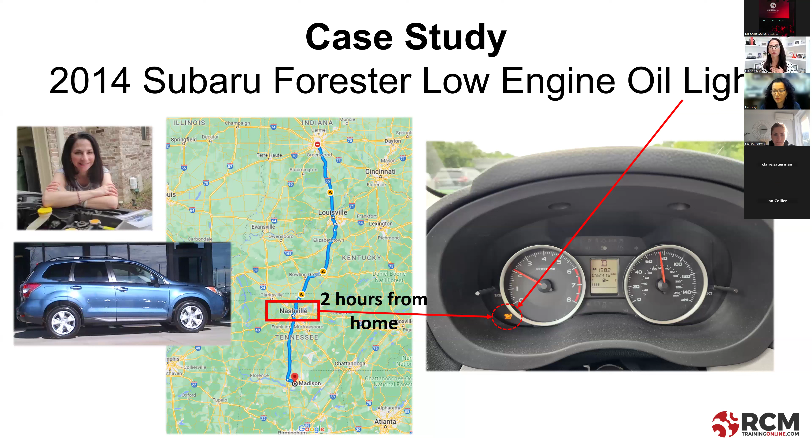Yeah, okay, definitely. Well, reliability-centered maintenance is definitely a process that can help you get out of a reactive mode. And one other thing I want to mention before we get into the details is learning about reliability-centered maintenance can be hugely advantageous, even if you never formally apply the process, because it's just jam-packed with the basics of maintenance and reliability principles. And one very important one that, in my experience, is still very largely either misunderstood or unknown.

So we'll go over that today, but just learning about RCM and the principles can help you. So let's just quickly go over our agenda and, more importantly, the goals for today's session. My number one goal is for you to understand what SAE J1011 compliant reliability centered maintenance is.

Now, will you put in the chat if you've ever heard of SAE J1011? If you see me looking this way, I'm just looking at the chat.

So SAE J1011 is a short document. It's just 15 pages, but it is the internationally recognized standard on reliability-centered maintenance. This document does not teach you how to do reliability-centered maintenance, but rather it just sets forth what an RCM process must entail in order to be called reliability-centered maintenance.

Now, this came out decades ago, but the reason why it was even established is because reliability-centered maintenance is very often so misunderstood. So I tell you this, number one, to be aware of the standard, but also to let you know that what I'm going to share with you today is compliant with the standard. So it's not my particular flavor, or I've not put my spin on RCM. I'm teaching you SAE J1011 compliant reliability centered maintenance.

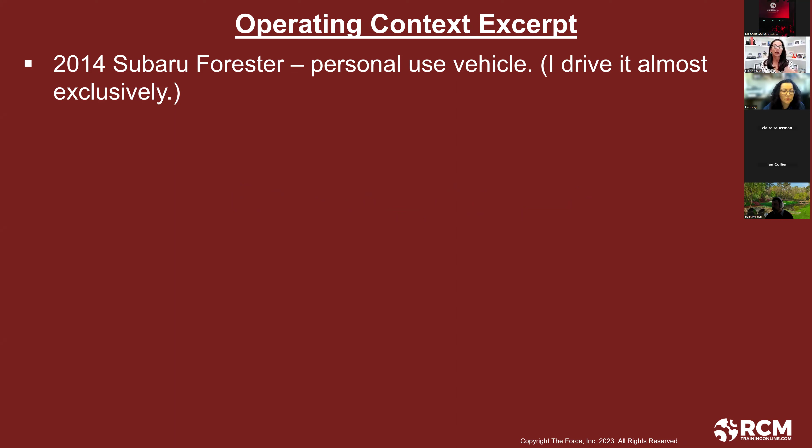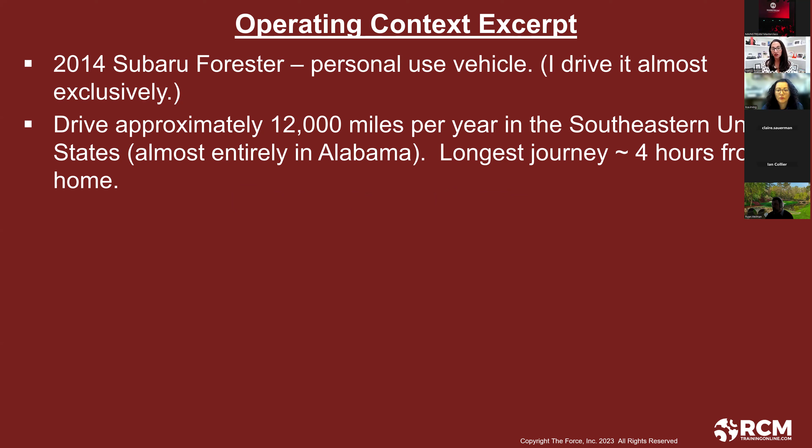Okay, I drive a 2014 Subaru Forester. It's a vehicle for my personal use. I drive it almost exclusively. Sometimes my husband might drive it, but generally it's just me. I drive around 12,000 miles per year in the southeastern United States, almost entirely in Alabama. The longest journey that I might take is about 4 hours from home. I do have a backup car, a 2004 Toyota Corolla.

And the scope of our analysis today is going to be limited to those failure modes that would result in illumination of the low engine oil light and the low engine oil light system itself. Now, I'm using the word system because, of course, there's the light and then there's the associated circuitry, the whole thing. Now, in the real world, we would have a much larger scope of analysis, but for purposes of today, the scope is very small.

Okay, I have a 2.5 liter horizontally opposed 4-cylinder boxer engine with 170 horsepower. And in my car, the low engine oil light illuminates in the event that the engine oil decreases to the lower limit, which is a little more than 1 quart. Okay, so that kind of sets the scene for our case study as far as the operating context goes.

So now let's jump into what reliability-centered maintenance is. This is the definition that I like to use. It's a zero-based process that's used to identify the failure management strategies. Notice here, I don't say proactive maintenance tasks because it's more than just maintenance, but stay tuned on that. Failure management strategies that are required to ensure an asset meets its mission requirements in its operational environment in the most safe and cost-effective manner. There's a lot rolled into that definition, and we'll go deeper into it as we go into more of the steps. I may refer back to it.

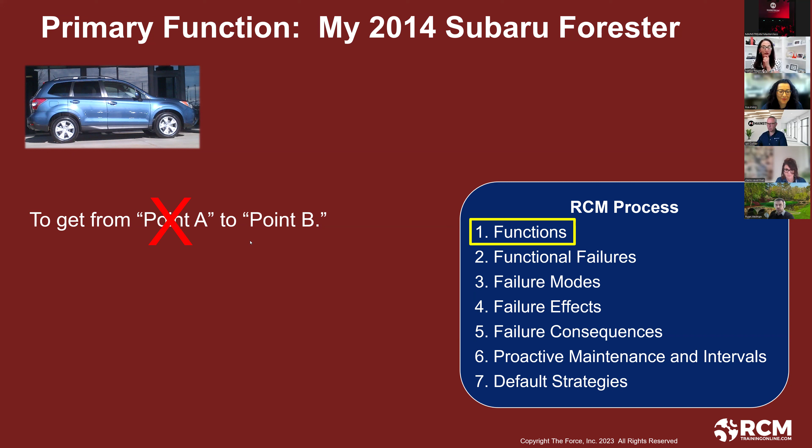Let me know in the chat if you've ever experienced that. Yeah. Oh, yes, Michael or Mike. Yep. When I do this live and I'll say, raise your hand if you've ever experienced chronic failure because you figured out you were asking your machine to do more than it could, I get several hands in the air. Okay. So this is definitely not detailed enough. So let's look at how to write a function properly. It includes a verb plus the word to plus a verb plus an object plus a performance standard and operating context when we need it.

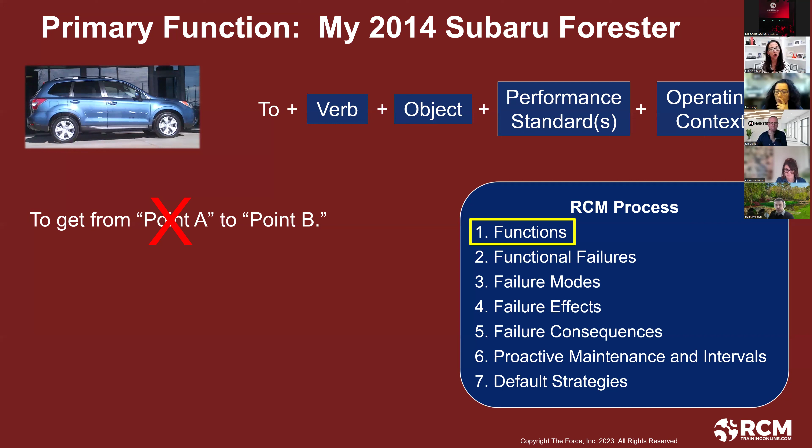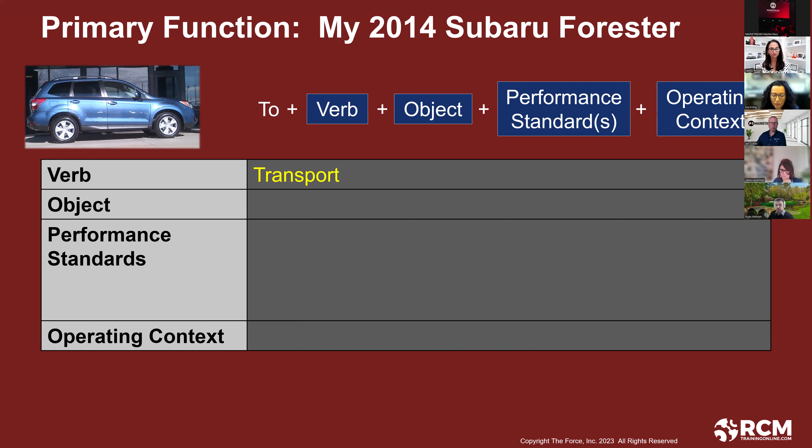So let's take a look with me as the owner and operator of the asset. I'll share with you how I wrote my primary function. So what do I need to do? I need to transport. What do I need to transport? Up to 5 adult passengers and 3 medium-sized suitcases. And how well do I need it to do it? I need it to do it along paved roads and highways. I need to be able to drive up to 360 miles without stopping in climates that range from 0 to 115 degrees Fahrenheit while protecting passengers from the elements. So this is an example of a primary function that identifies specifically what I need from the equipment, or in this case, from my car.

Any questions or thoughts about functions, about how to write them, or does all this make sense? I'll just pause for like 5 seconds. And if there are no comments, I'll just move on.

Okay. So now let's look at what this looks like on our FMEA. Because a question I often get asked is, should I do FMEA or should I do reliability-centered maintenance? But when you do RCM, you actually complete an FMEA, and functions is the first step. So here you see our function on an FMEA: functions, functional failures, failure modes, and failure effects. Now, if we were doing a full-blown RCM analysis on my 2014 Subaru Forester, we would also start listing some secondary functions.

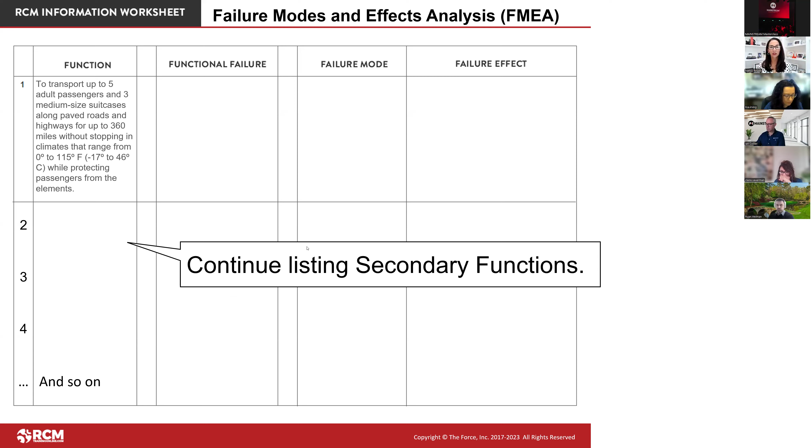So now let's pause and talk about evident versus hidden functions and what's the difference between the two. So in the context of reliability-centered maintenance, an evident function means that loss of that function would become evident to the operating crew under normal conditions. So, for example, let's say if the starter motor in your car failed, under normal circumstances, without any inspection, would you know if your starter motor in your car failed?

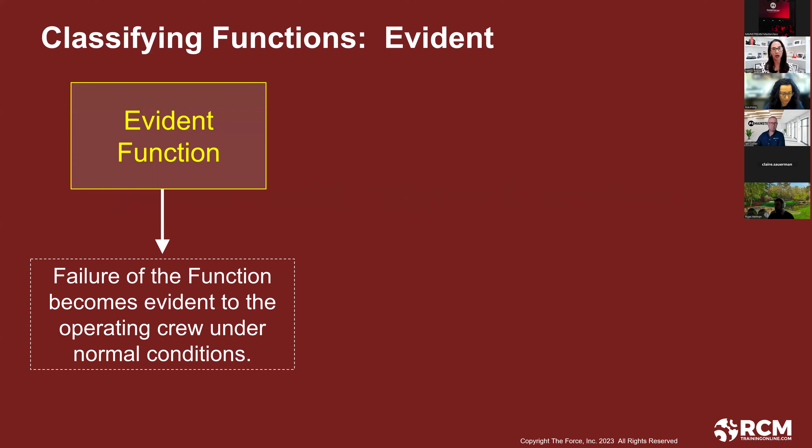Yes. Thank you guys for that. Yes, we would know. And how would we know it? Well, when we go to start the car, because it would be normal for me to have to go to work or to the supermarket. I'd get in the car and my car wouldn't start. So it becomes evident to me. So therefore, our primary function for the 2014 Subaru Forester is evident, right? If I can't transport at all, that is going to become evident to me.

So that's pretty straightforward. But now in the context of reliability-centered maintenance, let's take a look at what a hidden function is. A hidden function means that failure of the function is not evident to the operating crew under normal conditions.

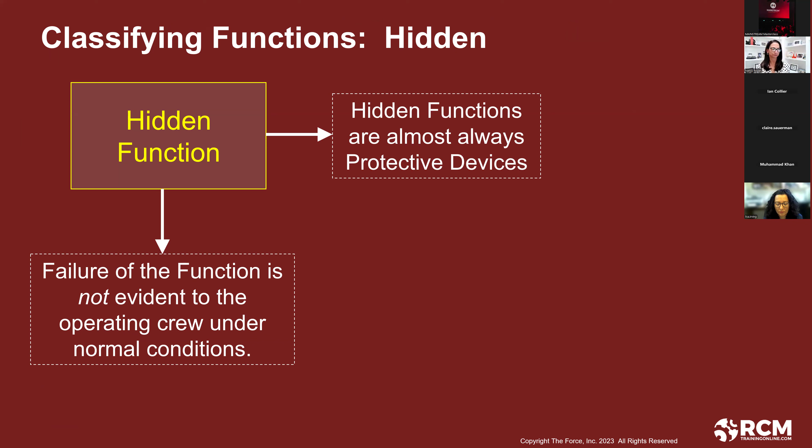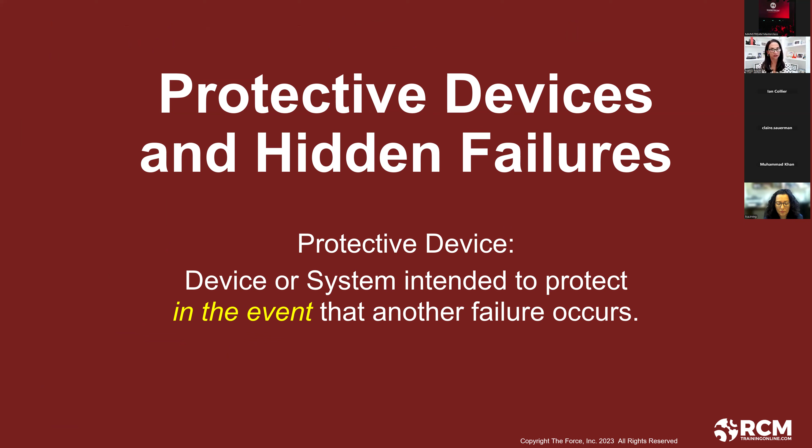Okay. So hidden function means that failure of the function is not evident to the operating crew under normal conditions. And hidden functions almost always apply to protective devices. A protective device is a device or a system that is intended to protect us in the event that another failure occurs. Now let's look at a very basic example, and that is a home smoke detector, a smoke detector that you might find in your kitchen, in your bedroom.

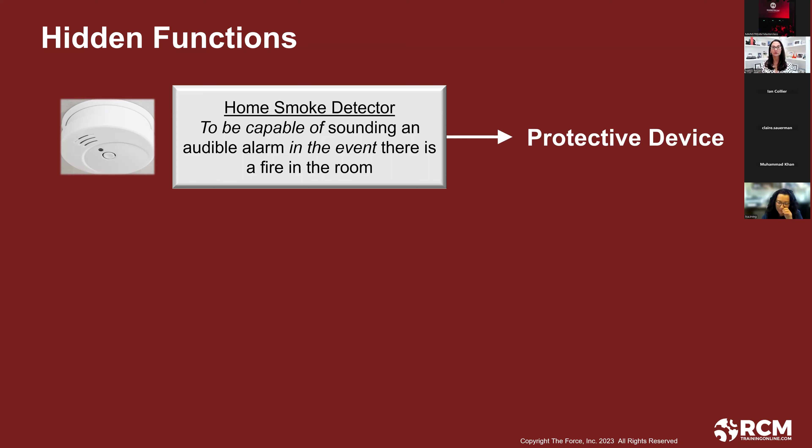So when we write functions for protective devices, we write them a little bit differently. We use the terms to be capable of, in the event that something else happens. So in the case of our smoke detector, it is to be capable of sounding an audible alarm in the event that there is a fire in the room. So in the context of reliability-centered maintenance, it is a protective device. Again, it's to save us in the event that something else happens.

So it's called a hidden function because failure of the function is not evident during normal situations. So right now in this room, if the smoke detector was in a failed state, would I know it? No. Thank you, Mazad. No, I wouldn't know it because under normal conditions, there's no fire. So it could be in a failed state and I wouldn't know it. That's the normal condition, that there's no fire. Now, if the smoke detector is in a failed state and I don't know it, that's what makes it hidden.

But if there is a fire in the room and the smoke detector is in a failed state, that in the context of reliability-centered maintenance is called a multiple failure. Any questions or thoughts about that? I want to make sure everyone understands what a multiple failure is.

So another example is just as simple as an e-stop, an emergency stop button on a machine, right? You only need to push the e-stop in the event that something else happens. Maybe there's an emergency and you need to very quickly shut down the machine. But if everything's going fine and there's no emergency, then you would never need to push the e-stop. So without inspection, you would only know it in the event that something else happened. So everyone good with that? Just give me a yes if you're good with that.

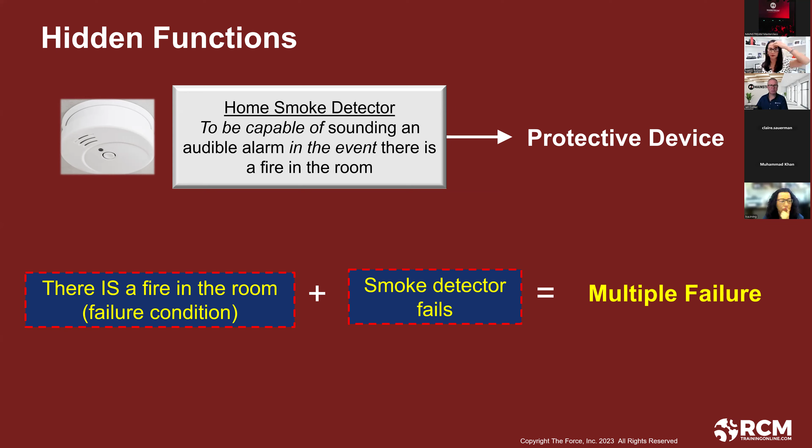In our case study, my low engine oil light - and from now on when I say the low engine oil light, I'm including the physical light and all of the associated circuitry. There's a whole line of things, something that detects and sends a signal and lights the light on the dashboard. So my low engine oil light is a protective device because under normal situations, the oil in the reservoir would not be low.

So let's write the function for the low engine oil light. Keep in mind, we're going to use 'to be capable of, in the event that.' So: to be capable of visually alerting the driver in the event that the engine oil level decreases to the low level limit. That's the function of my protective device, my low engine oil light.

Now let me ask you this: what is the multiple failure? Put it in the chat. Remember what we just went over with the smoke detector - the multiple failure would be a fire in the room and the smoke detector is in a failed state. What is the multiple failure for my low engine oil light?

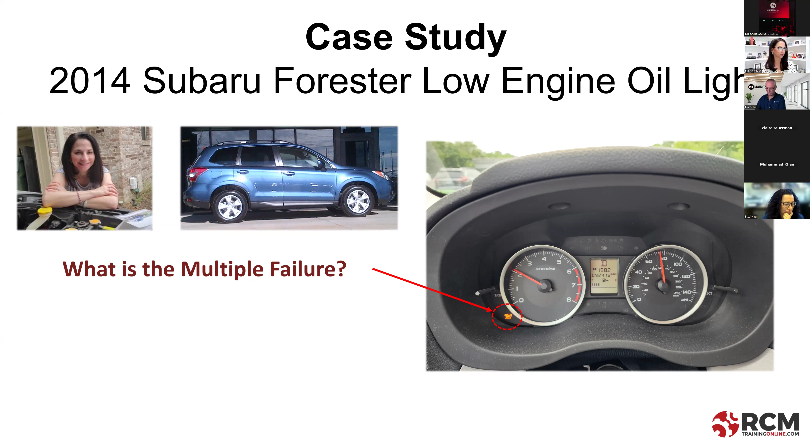Knowing that the light is on and doing nothing about it - that's definitely an issue, but what is the multiple failure? The light is not working, yes - so there's a failure within the circuit somewhere. And loss of engine oil - we have low engine oil and the alarm doesn't work. That's exactly right, excellent guys. Light off and car down - yes, that's my multiple failure: the oil in the reservoir falls to the low level limit and the low engine oil light system is failed.

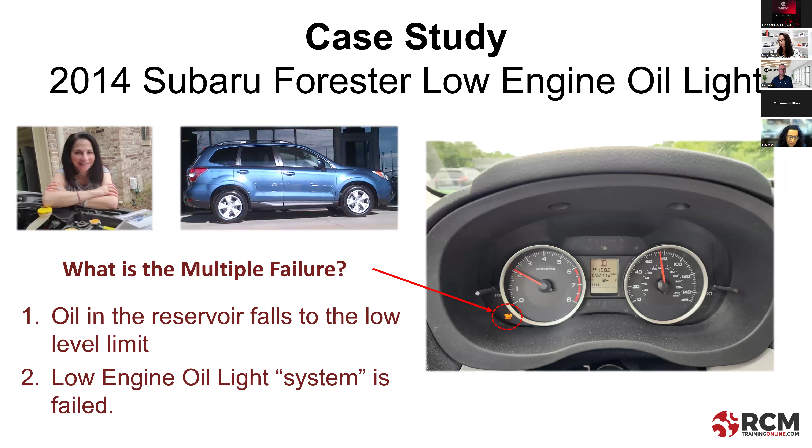So is the function of my low oil level light, my low engine oil light, evident or hidden in the context of RCM with what we just went through? Is it evident or hidden? The low engine oil light itself, the circuit - is it evident or hidden?

Yes, we have a mix of answers. Yes, Gerard, Nick, Ruin - it's hidden. That's right, it's hidden because normally, under normal circumstances, my engine oil level is normal, so I don't need the light. So if it's in a failed state, it's hidden to me. Any questions or thoughts about that? We'll do a little more work with that, but I just want to clear up if there are any big issues at the moment.

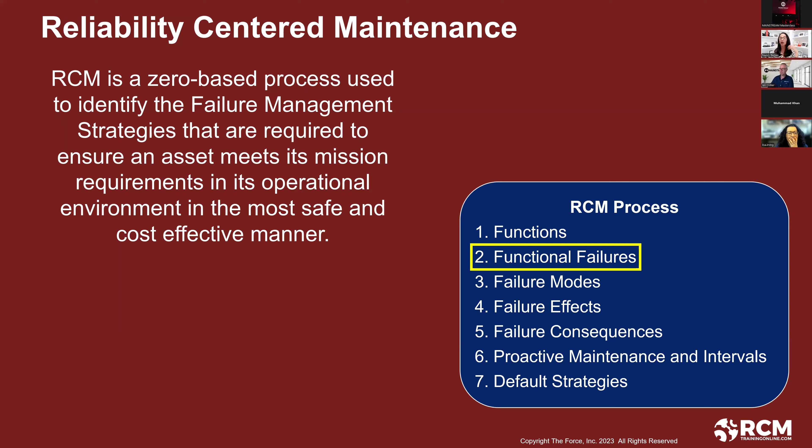Okay, so it's indeed hidden. Let's move on to step 2 in the RCM process, and that is functional failures. As a practitioner of reliability-centered maintenance, functional failures I would say is probably the easiest step. So we're going to go over this really quickly.

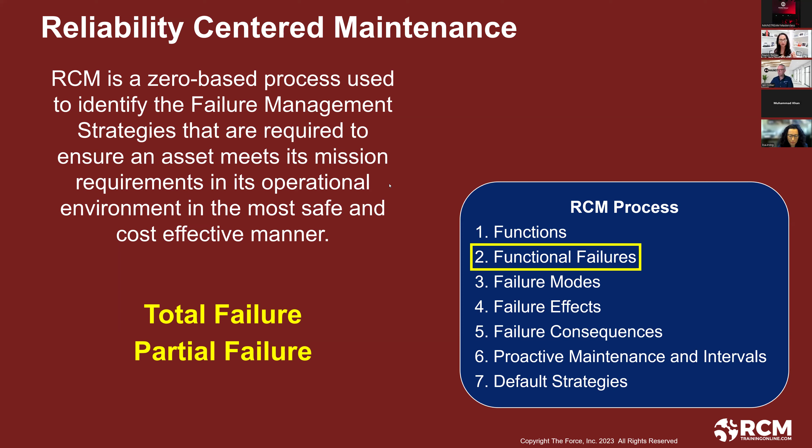When we write functional failures, we write functional failures for each function that we list, and we list total failure and partial failure. So in the example of our primary function for my 2014 Subaru Forester, what would total failure be? If you can just imagine, what would total failure be of my car? Completely unable to what? Yes, it stops running - completely unable to operate.

Okay, you guys, some of you are giving me failure modes, so you're thinking ahead. Yes, it's failure, cannot transport at all. Yes, that is exactly it.

Completely unable to transport. And in the case of our low engine oil light, what would total failure be? Completely unable to do what, or incapable of doing what? Would it just be incapable of alerting you to the issue? Yes, that's exactly it. Who said that? Me, Tom. Tom, that was you. Yay, Tom, yes - I thought I'd just, I got sick of typing, so. Thank you. Oh, thank you guys for participating so much in here, these are great answers. Incapable of visually alerting the driver in the event that the engine oil level decreases to the lower limit.

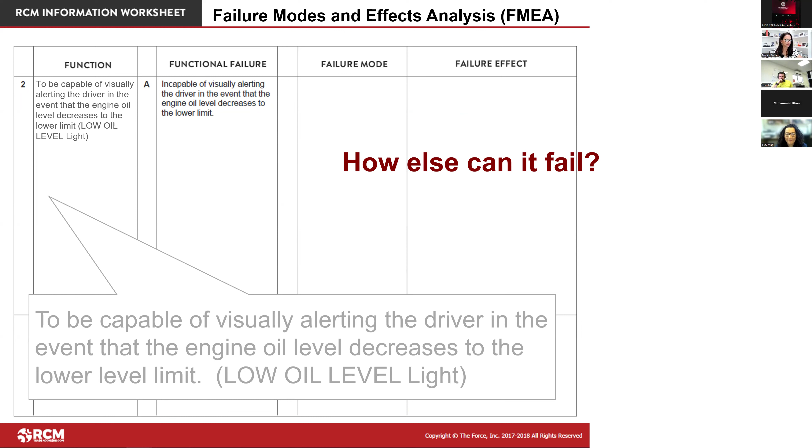Now, this circuit can fail another way - how else can it fail? It can give you a false alarm or a false reading, exactly. It can falsely illuminate, which is one of the things that was going through my mind while I'm driving. That's probably the least likely, but it was a possibility. Okay, so that was super quick on functional failures.

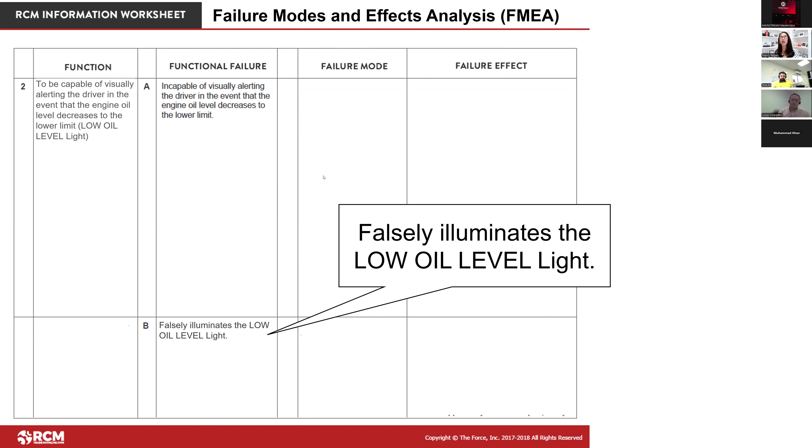Some of you are writing failure modes in the chat, which is excellent because that is our next stop. And it's my favorite part of RCM to talk about - failure modes. It's such an important part of RCM.

Okay, so the first thing I want to say is that when I use the term failure mode, I mean the same thing as a failure cause. In our industry, people use all kinds of different terminology to mean different things or the same things. But for purposes of today, a failure mode is what specifically causes functional failure. So the term failure mode is synonymous with failure cause. And just for the record, SAE JA1011 uses the term failure mode.

Now, something else my mentor, John Moubray, taught us is that we manage assets at the failure mode level. When you stop and think about that for a second, that we manage physical assets at the failure mode level, whether we may realize it or not, that's one of the reasons why it's so important that we proactively and correctly identify and write our failure modes. So once we have specifically written what would cause our functional failures, then we can use the last 4 steps in the RCM process to figure out what we should do to manage it, if anything at all.

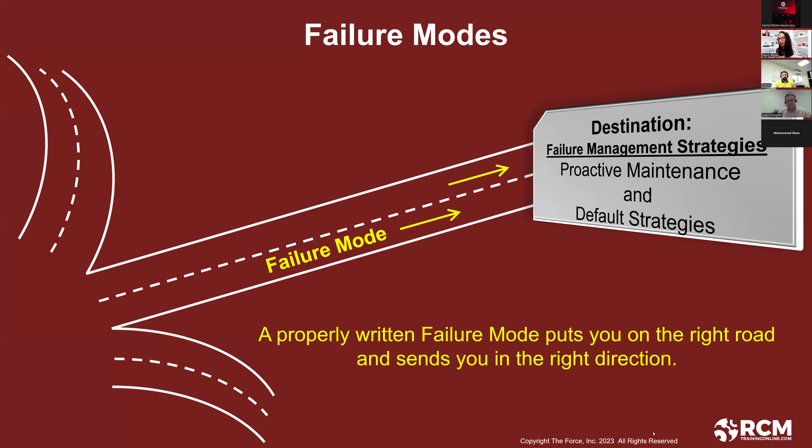Now, what do I mean by that? Let's pause here for a second. Reliability-centered maintenance, like I mentioned when we first started, is way more than just creating proactive maintenance tasks for your equipment. That is one of the major products, but it can do so much more.

But the point I want to make is that failure modes are the currency of physical assets. And there's lots of different currency out there in the world. And the same thing goes for our assets, because we, as physical asset managers, we're responsible for the reliability of our equipment. So when we do the right maintenance at the right time, that helps to get the reliability that we need.

But there are a lot of other influences on our equipment. What about things like operating procedures? How about the quality of our technical publications? How about how badly or how well we train our people? The physical design of the equipment. What about supply issues? Troubleshooting procedures, failure finding tasks, which we'll talk about a little more in a little while.

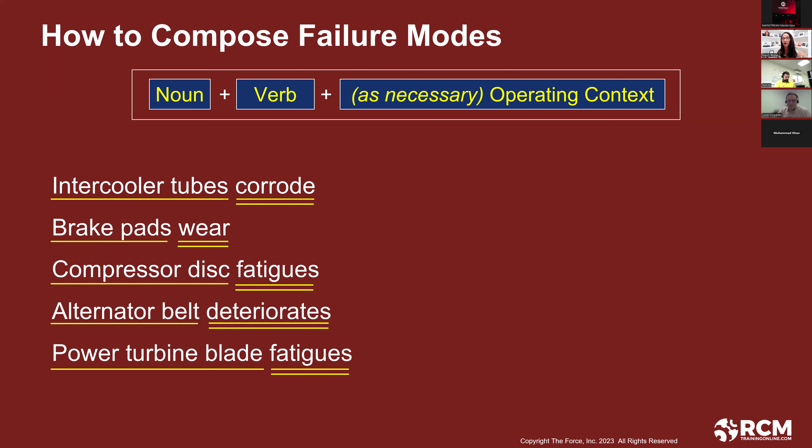Let's look at a few quick examples. Intercooler tubes corrode. Brake pads wear. Compressor disc fatigues. Alternator belt deteriorates. Power turbine blade fatigues. With one underline, that's the noun, and with two underlines, that's the verb. Now we can add some operating context and just say due to normal use for all of them. That's pretty simplistic, but let's dive a little deeper.

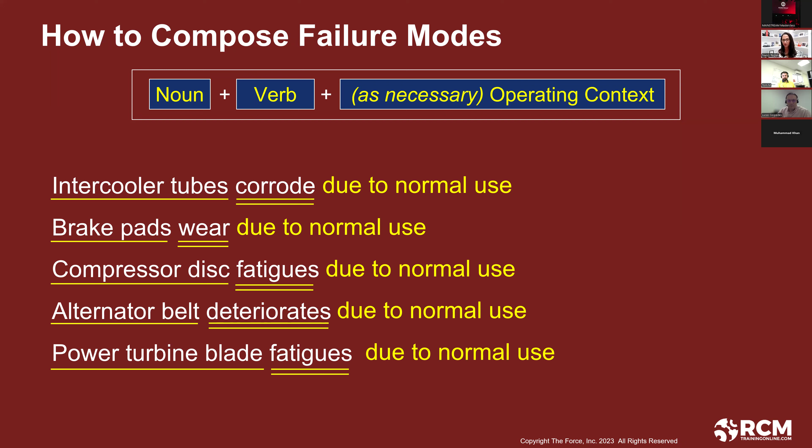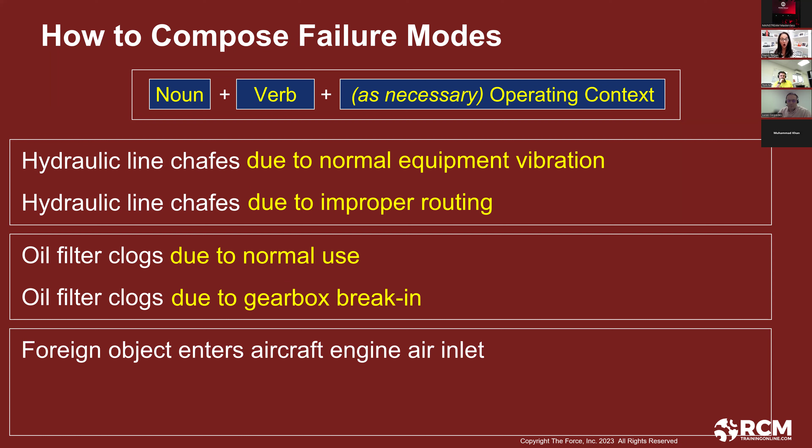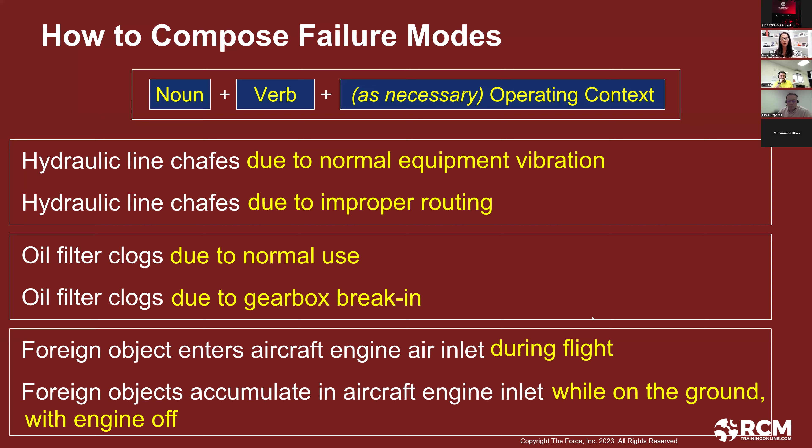Hydraulic line chafes, hydraulic line chafes. They both look like they're the same failure mode, but are they? Because if I were facilitating, I would ask the question: what specifically causes the hydraulic line to chafe? It could be due to normal equipment vibration or due to improper routing. An oil filter can clog just due to normal use or because of gearbox break-in. A foreign object can enter the aircraft engine air inlet during flight, or it can accumulate while it's on the ground with the engine off. Now, remember how we talked about our failure mode being like a road.

Let's take a look at that to show you what I mean when I say it's like a road that leads us to our failure management strategy.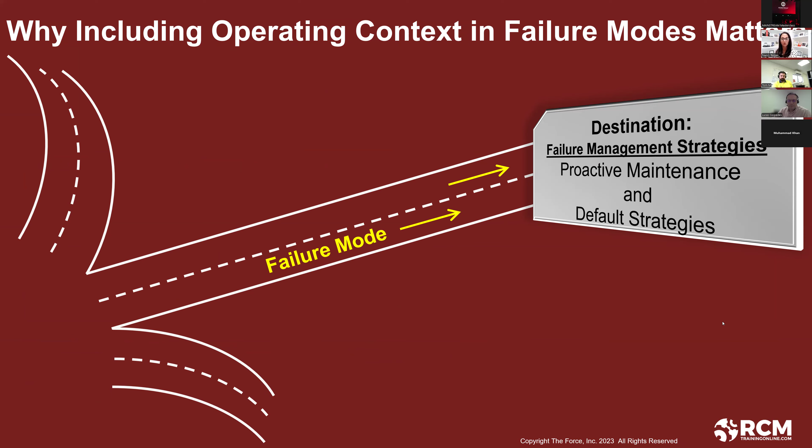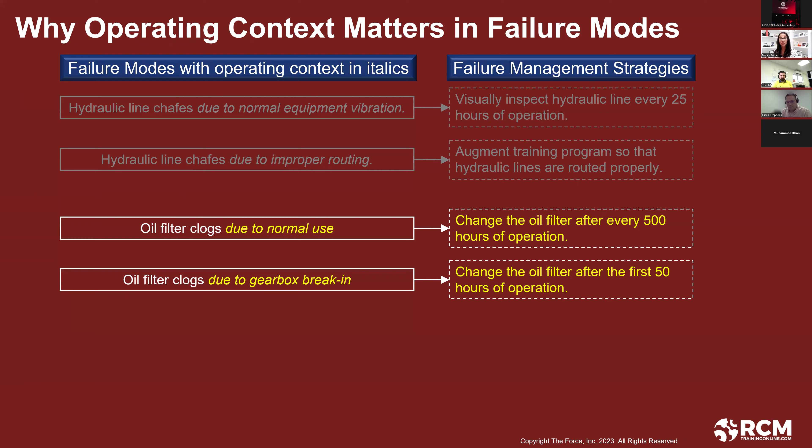Let's look at hydraulic line chafes due to normal equipment vibration. The failure management strategy for that could be: inspect my line every 25 hours and replace it as required. If it's improper routing, I probably want to augment training. Without the operating context, it's not written specifically enough to get me where I need to go. Same thing with the oil filter: it clogs due to normal use, so maybe I want to change it on a scheduled basis every 500 hours of operation. Due to gearbox break-in, maybe I only need to change it after the first 50 hours of operation, and that takes care of that failure mode.

For a foreign object in the engine air inlet during flight, there's nothing I can do to predict or prevent that. But remember we talked about default strategies, which means anything other than proactive maintenance. That is a plausible failure mode - we hear about that often in the news. So there's no way to predict or prevent it, but we can formulate an emergency procedure for an in-flight engine failure that reduces the consequences of failure to a tolerable level for us.

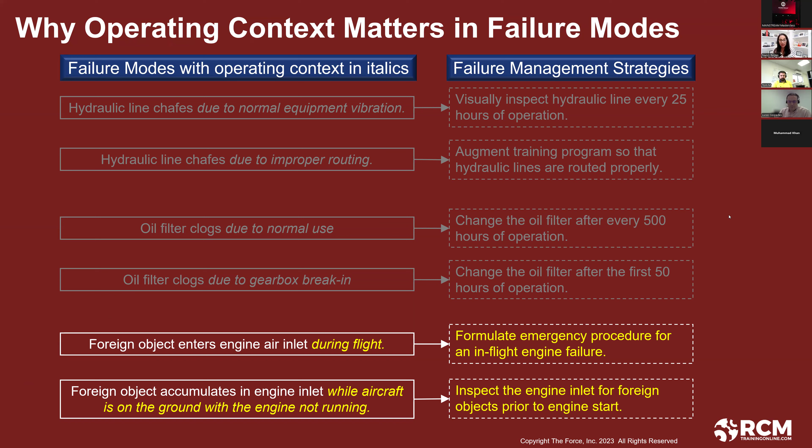For it accumulating on the ground, we can inspect the engine inlet for foreign objects prior to engine start. So you can see there are different solutions for these failure modes. In this case it's proactive maintenance, but in the case of the improper routing, that is a default strategy or an update to a training program. So you can see how reliability-centered maintenance is more than just maintenance.

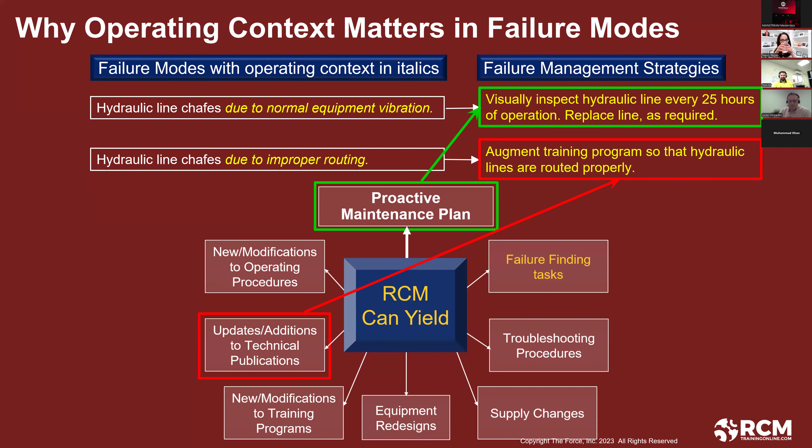So now if we get back to me being on the side of the road, when my low engine oil light went on and I'm driving, I really did immediately go into RCM mode. I was thinking to myself, okay, what specifically could cause this light to illuminate? And I identified 3 things. One is that it's a boxer engine, and the engine in my Forester does actually consume oil. So the oil level could be low due to normal consumption. If that's the case, I probably have enough oil to make it all the way home without doing any damage to my engine. But I don't know that in the moment.

The second thing it could be is I could have a leak in my oil system. That's worst case scenario, right? In that case, it's a pretty hefty leak where the reservoir could deplete quickly, and I could do some serious damage to my internal engine components. And the third one, that you guys in the chat identified, is that the light could falsely illuminate - there could be a problem in the circuit. So these are the 3 things that were going through my mind.

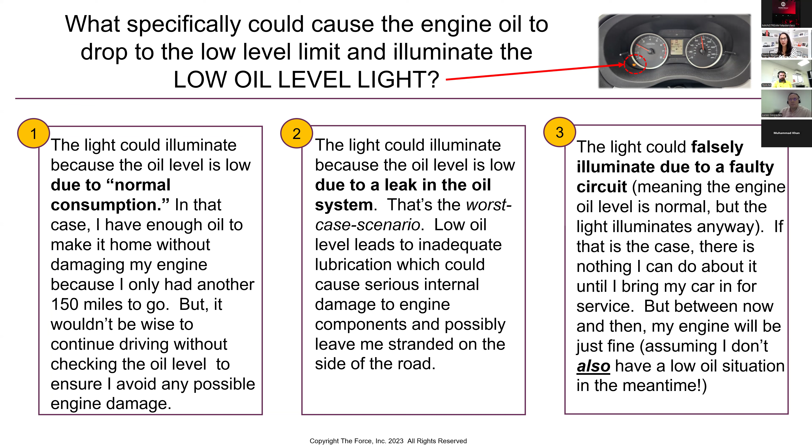So now the next thing I want to do is go to step 4 in the RCM process, and that is failure effects. A failure effect is like a little story of what would happen if we did nothing to predict or prevent each failure mode. Two important points about failure effects. Number 1, we always document the worst case scenario - the worst plausible worst case scenario. And here's the key to failure effects: if anyone were to ask you, why do we write a failure effect? Here's the number 1 reason, the primary reason - we have to write it in enough detail so that we can assess the consequences of failure.

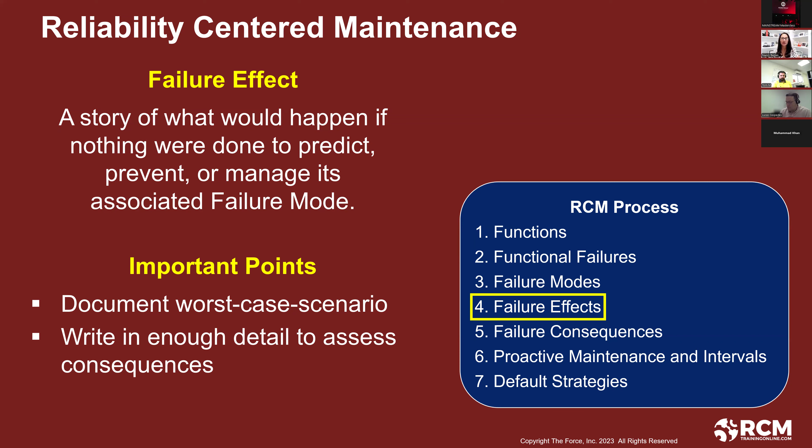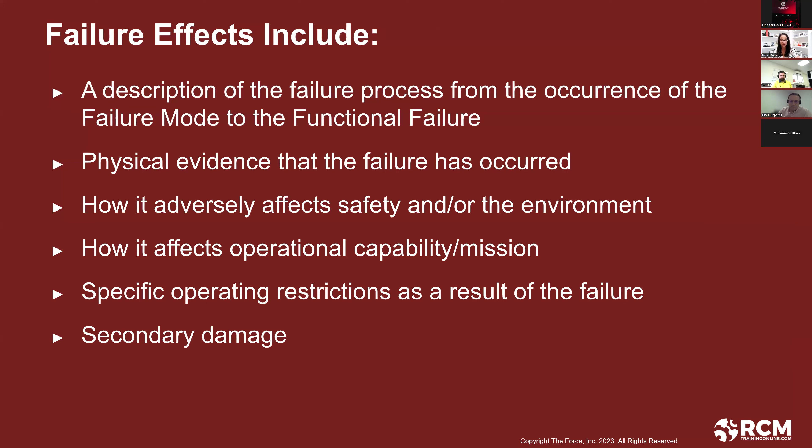Here's what a failure effect needs to include: a description of the failure process from the occurrence of the failure mode to the functional failure, physical evidence that the failure has occurred, how it adversely affects safety and/or the environment, how it affects operational capability or the mission, specific operating restrictions as a result of the failure, secondary damage, and what must be done and how long it takes to repair the failure.

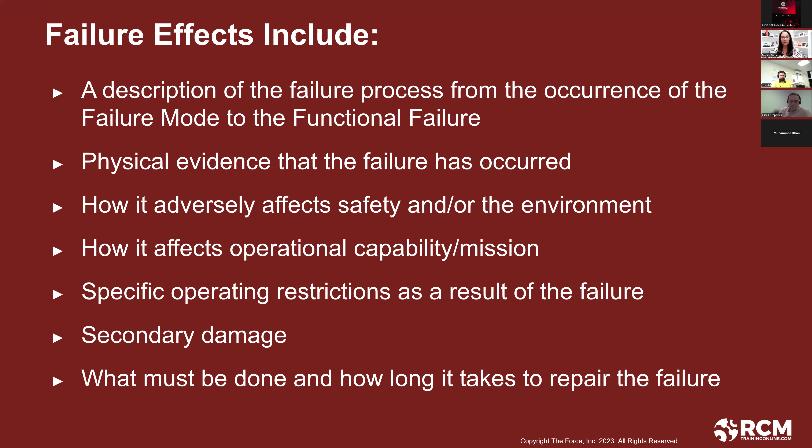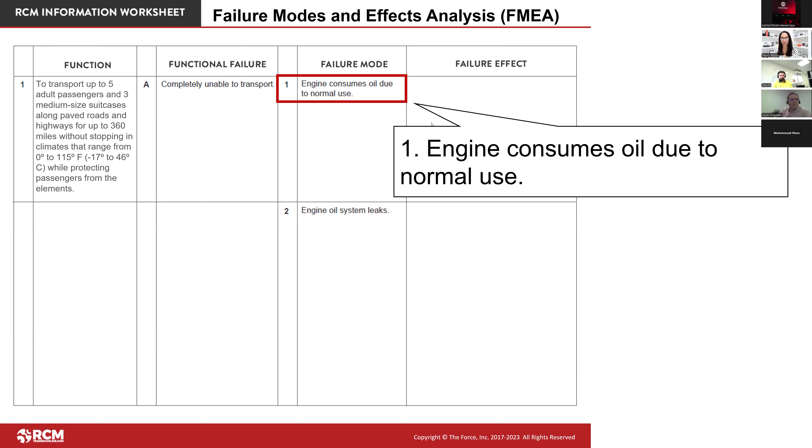So let's look at a failure effect for one of our failure modes. And that is the failure mode that I experienced that I didn't proactively manage. And that is engine consumes oil due to normal use.

Let's read that together. During engine operation, the oil is gradually consumed by the engine. The decrease in oil is indicated on the dipstick. If this goes unnoticed, AKA if the operator never looks at it, eventually the engine oil drops to the point that the low oil level light illuminates. The driver pulls over at the nearest service station and checks the oil. The dipstick indicates that the engine oil is low. The driver replenishes the oil and continues to the destination, but with some delay. Downtime to repair up to 30 minutes. So that's pretty much what I experienced.

Any questions or thoughts on the failure effect before we move on?

One thing I want to note is that the failure mode is recorded under total failure. You can see here in our FMEA where a failure mode is indicated by a number, so 1A1. I put it under the total failure because it imposes operating restrictions. In other words, it makes me pull over, so it makes me lose my primary function.

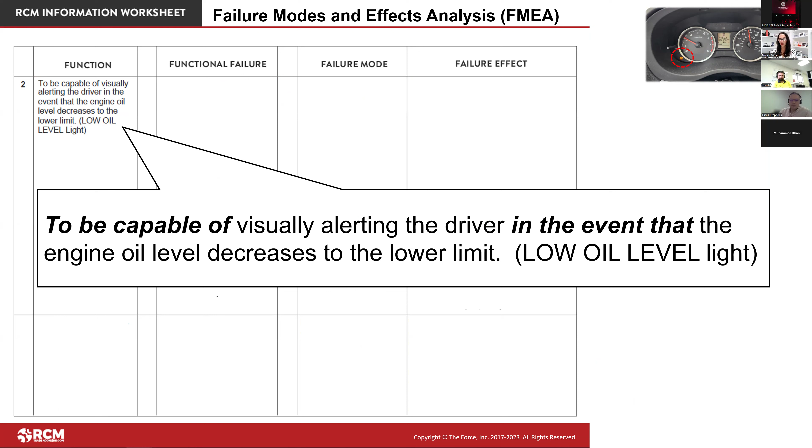Okay, let's look at our low engine oil light. Remember, we've already written this function to be capable of visually alerting the driver in the event that the engine oil level decreases to the lower limit. We've already written our functional failure: incapable of visually alerting the driver in the event that the engine oil level decreases to the lower limit. So what specifically could cause that functional failure?

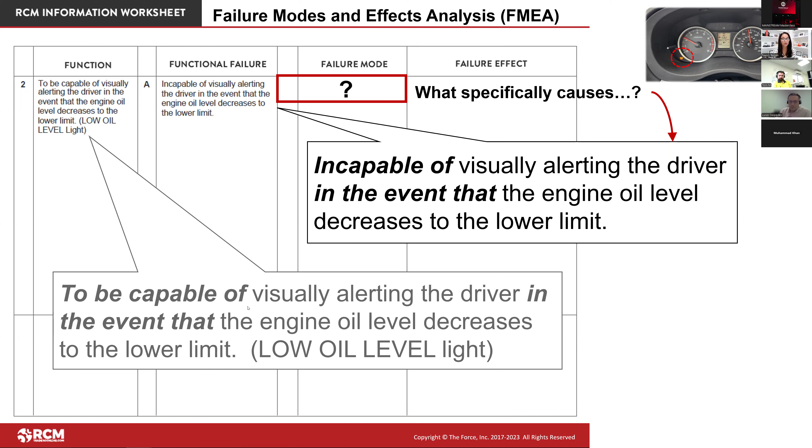Well, my low oil level light circuit could fail open, right? Anywhere in the circuit. So once again, just noting our FMEA, our failure modes and effects analysis, our failure mode is designated by a number. Now let's read this failure effect together.

This failure mode only matters in the event that the engine oil level decreases to the lower limit. The driver is unaware of the low oil situation and continues to operate the vehicle. The oil level continues to drop. Engine components are not properly lubricated and start to wear abnormally. Eventually, engine oil pressure decreases and engine oil temperature increases. The oil pressure warning light and/or the check engine light illuminates on the dashboard. Driver must pull over and cannot get to the desired destination on time.

It's likely that the driver can find a safe place to pull over and call a tow truck. However, worst case, the driver must pull over on a busy highway or a dark country road at night. The oil system is repaired as required. Any secondary engine damage is repaired as required. Worst case, engine must be replaced. Downtime to repair, 3 days to 1 month at a cost ranging from $1,000 to $8,000.

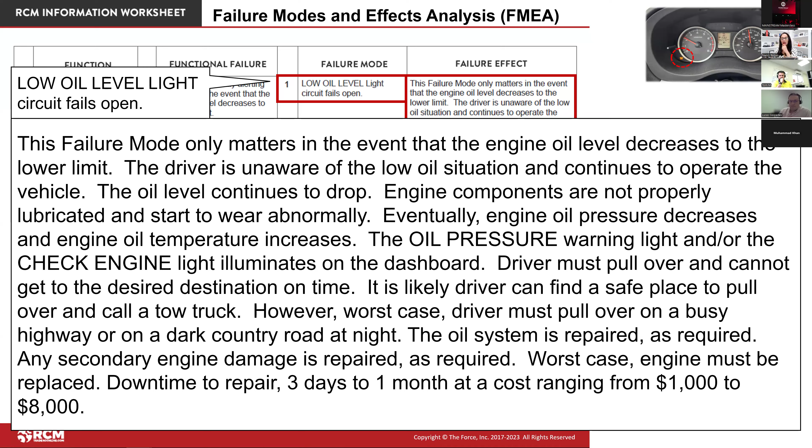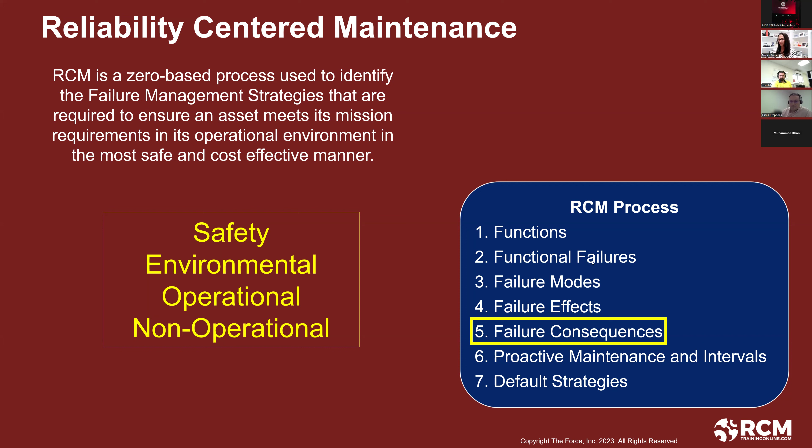The next step in the RCM process is failure consequences. That is when we identify if a failure mode has safety, environmental, operational, or non-operational consequences. We identify one of the four. It's relatively straightforward. In step 6 of the RCM process is when we start figuring out how we can manage each failure mode.

Step 6 is when we identify proactive maintenance and intervals. Now, in the context of reliability-centered maintenance, proactive maintenance means a scheduled restoration, a scheduled replacement, or condition-based maintenance, or CBM. Now, in SAE JA1011, condition-based maintenance is referred to as on-condition maintenance. I'm going to use the term CBM because we put in the chat which term you use. Like, do you normally say CBM for condition-based maintenance?

Another term we hear in our industry is predictive maintenance, which is essentially the same thing, but generally predictive maintenance refers to more sophisticated monitoring, like with... what's the word I'm looking for? Like strain gauges. I can't think of the word I'm trying to use, but strain gauges are equipment that's put directly on equipment that's supposed to tell us that failure is in the process of occurring.

Put in the chat if you use CBM or on-condition maintenance. Sensors. Thank you, Ezekiel. Oh my gosh, I couldn't think of the word. Thank you. Yes, vibration analysis is a form of CBM. Okay. So when I use the term CBM, I'm talking about condition-based maintenance.

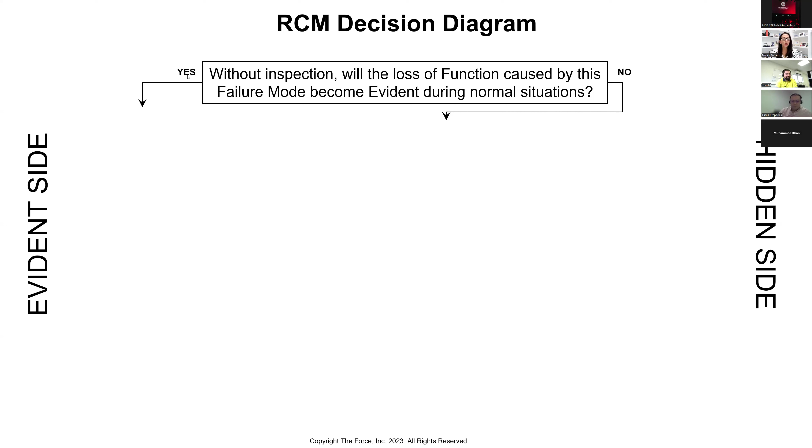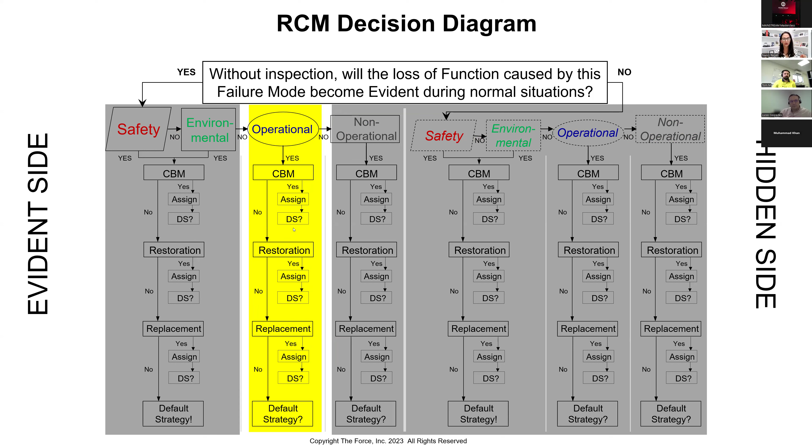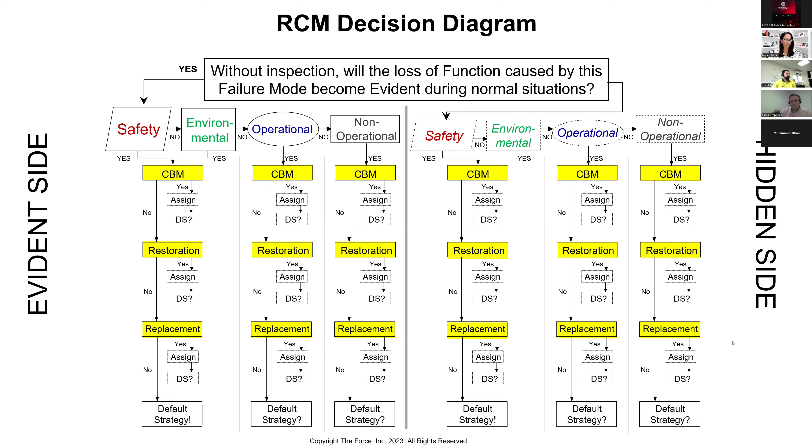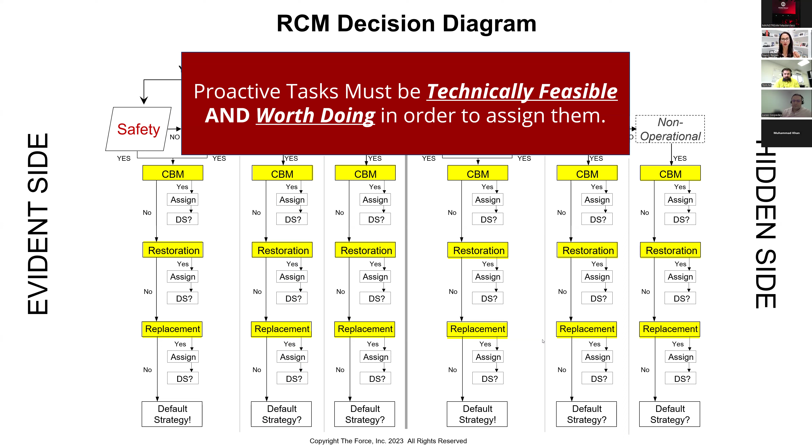Now, generally speaking, on the RCM decision diagram, you see we've got condition-based maintenance, we consider scheduled restorations, and we consider scheduled replacements as far as maintenance is concerned. In the context of reliability-centered maintenance, if we are to assign a proactive maintenance task, it must be technically feasible and worth doing. Let's look at what that means, and let's actually analyze our failure mode. Engine consumes oil due to normal use. So what we're going to do together is identify if a CBM task for this failure mode is technically feasible, in other words, technically it makes sense to do it, and 2, is it worth it?

So we have to do a little introduction for on-condition maintenance. Now, my slides say on-condition maintenance because that's what SAE JA1011 calls it, but CBM or condition-based maintenance, it's the same thing. All right, an on-condition task or a CBM task is performed at a defined interval to detect a potential failure condition so that maintenance can be performed before the failure occurs.

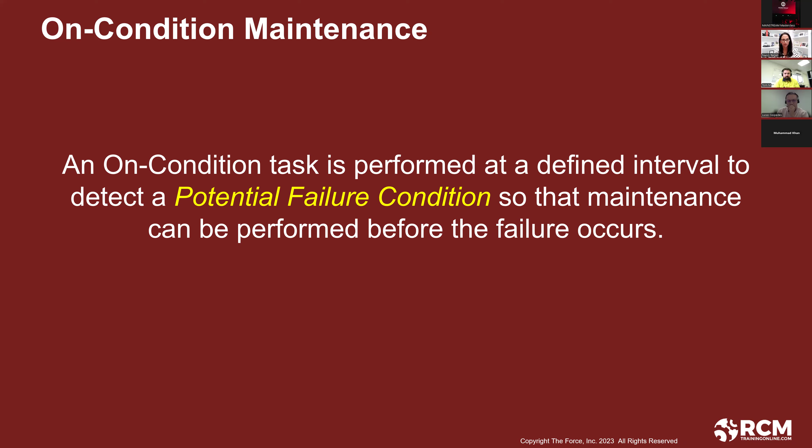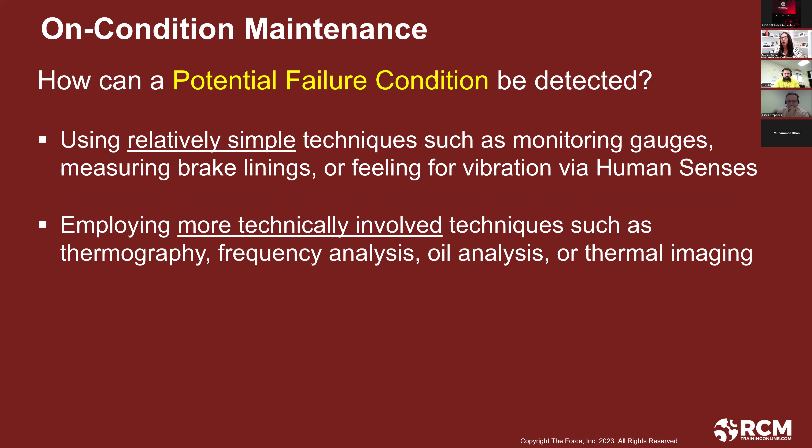How can we identify a potential failure condition? With relatively simple techniques like measuring brake linings, employing more technically involved techniques like oil analysis, with continuous monitoring with sensors directly installed on machinery. And today we hear about the industrial Internet of Things, and things are getting even more technically involved in our industry.

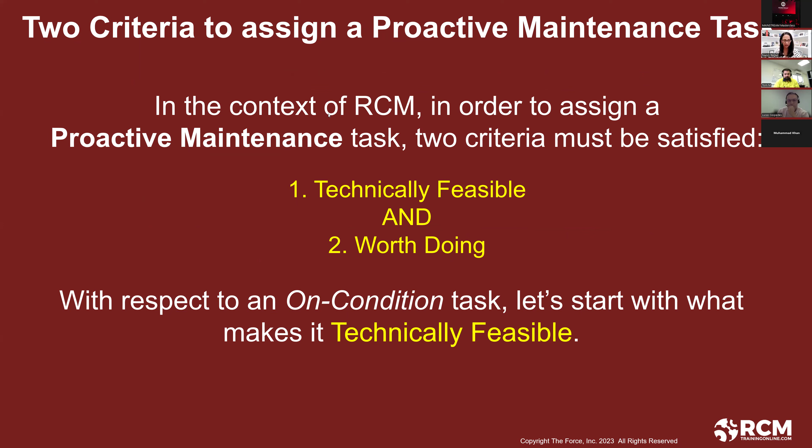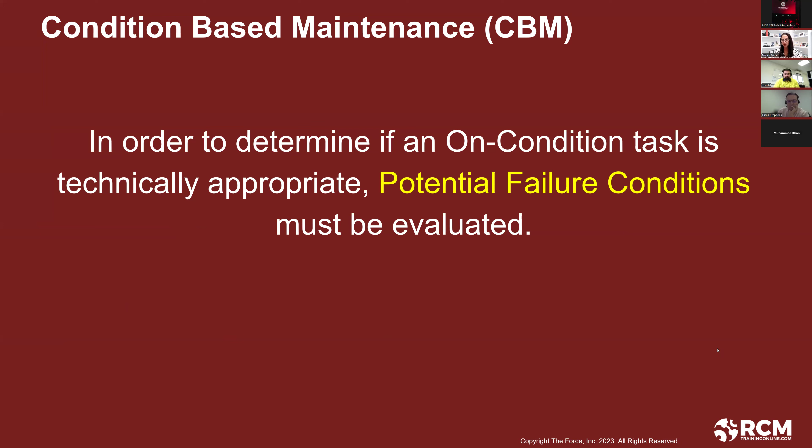Okay, so in the context of RCM, in order to assign a proactive maintenance task, we have to determine that it's technically feasible and worth doing. So with respect to a CBM task, let's start out with what makes it technically feasible. In order to determine if an on-condition task is technically appropriate, potential failure conditions must be evaluated. And so now I'm going to introduce you to the P-F curve.

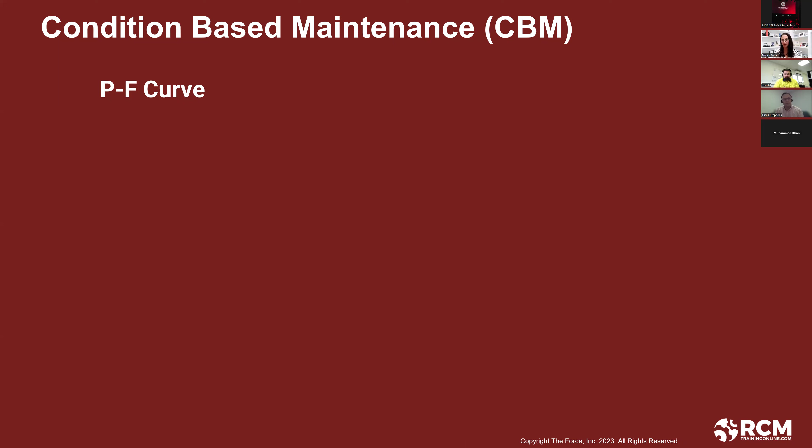If you know all about the P-F curve, then what I want you to think about is who in your organization doesn't know about it, but needs to know about it. And if you've never heard of the P-F curve and the P-F interval, then know that you are not alone, because this is still one of the most unknown or misunderstood concepts in our industry. Okay, here's the P-F curve. The x-axis is time, and the y-axis is the resistance to failure.

Let's assume we install a new component here. After a certain amount of time goes by, most failure modes give us a warning that failure is in the process of occurring. In other words, it creates a potential failure condition, like vibration. And if we ignore it, say, forget about it, then failure occurs. The time between when a potential failure condition is detectable and failure occurs is called the P-F interval.

Let's look at an example. Let's take a very simple example of a V-belt. And let's say I install a new V-belt today. We know that V-belt isn't going to last forever. And eventually it's going to be in the process of failing, and it's going to display a potential failure condition. For example, visual evidence of cuts and frays. And if we never look at it, eventually the belt is going to break.

Now, the time between when there is visual evidence of cuts and frays and the time the belt breaks, that's called the P-F interval. So we as physical asset managers, or as an RCM team member, we have to identify it.

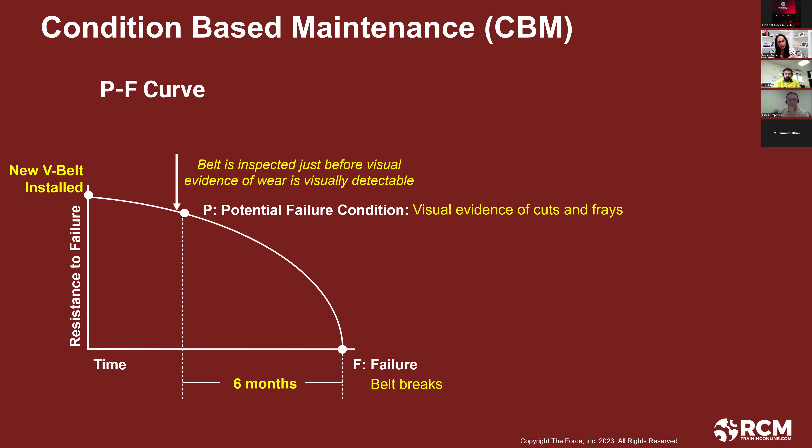Peter, let's say you go out today. You don't know it, but you're here on your P-F interval. So you go out there, you don't see any evidence of cuts and frays. The next time you come back is going to be 3 months later, right? So we're going to be roughly here on our curve. Now, at that point, you're going to see the evidence. So the time remaining you have to take action to do something about it, in other words, to manage the consequences of failure, is 3 months.

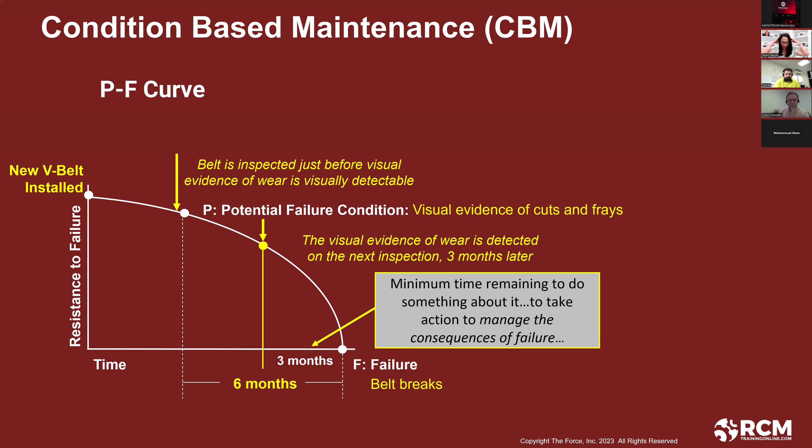In the context of reliability-centered maintenance, this is called the net P-F interval, but don't get wrapped up in the terminology. What I want you to know is that's the minimum amount of time that you have left to take action. Here's the point about condition-based maintenance. It doesn't matter how often failure occurs. What matters is how quickly failure occurs once a potential failure condition is detectable. I want to pause on that for a second; put in the chat if you have any questions. The key to CBM is how quickly failure occurs once a potential failure condition is detectable.

So let me ask you a question. Let's assume that I have to take this asset offline in order to visually inspect the belt. If I only take it offline once a year, can I monitor the belt at intervals less than the P-F interval? Yes or no? No, I cannot. So this P-F interval is of no use to me. But if in my second scenario, I take it offline every month, can I monitor it at intervals less than the P-F interval? Absolutely.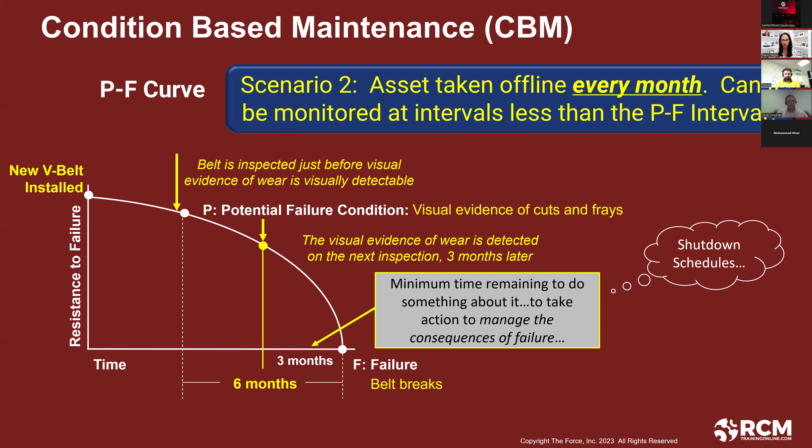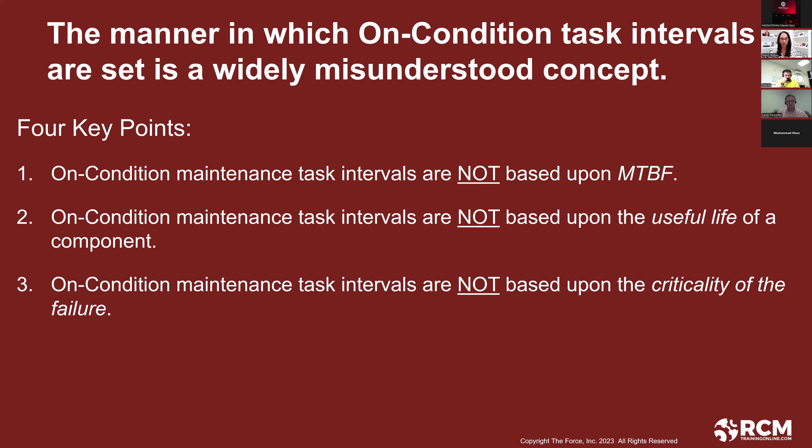Okay, but before that, 4 key points. Number 1, CBM task intervals are not based upon mean time between failure. CBM task intervals are not based on the useful life of a component. They are not based upon the criticality of failure. CBM task intervals are based on the P-F interval. In other words, how quickly failure occurs once the potential failure condition is detectable.

Now, let me ask you a question. Let's say I go out every 3 months to check the belt, and I've gone out there for the last year and I've not seen any wear on the belt. Does that mean I can extend my P-F interval? If I've gone out there for a year, every 3 months, I've gone out 4 times and I've not found cracks and frays, does that give me technical justification to extend my P-F interval?

Excellent, Peter. No, it does not. Because that's this time span. I don't care about this when it comes to CBM. All I care about is how quickly failure occurs once the potential failure condition is detectable. So don't make that mistake. Okay, any questions or thoughts? Because now we're going to go back to our case study.

Okay, Matt says, would it depend on the impact of failure? So Matt, the straight answer is no. The CBM task intervals are based on the P-F interval. So let's say we determine it's 6 months and we're going to do our task every 3 months. Let's say that failure mode has very severe consequences. Someone could be injured or killed. You may want to do the inspection every month to make sure you don't miss it. That's where consequences would come in.

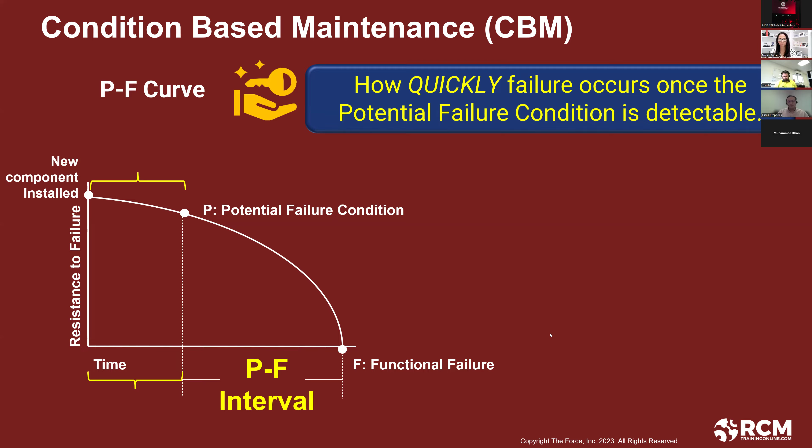Okay, you ready for this? Let's go back to our failure mode. Engine consumes oil due to normal use. We've already read our failure effect, right? It means I have to pull over on the side of the road, check the oil, and replenish the reservoir. So engine consumes oil due to normal use. Without inspection, will loss of function caused by that failure mode become evident to us during normal conditions? Yes or no? And you can refer to the failure effect if you're not sure.

Yes, it will, right? My light's going to come on. I'm going to know it. Me as the owner and operator of the vehicle, thank you, Peter. Yes, oil light low on. I say for me, that has operational consequences. So that leaves me going down this column in the RCM decision diagram. And the first thing I'm going to do is consider condition-based maintenance. So let's get to it.

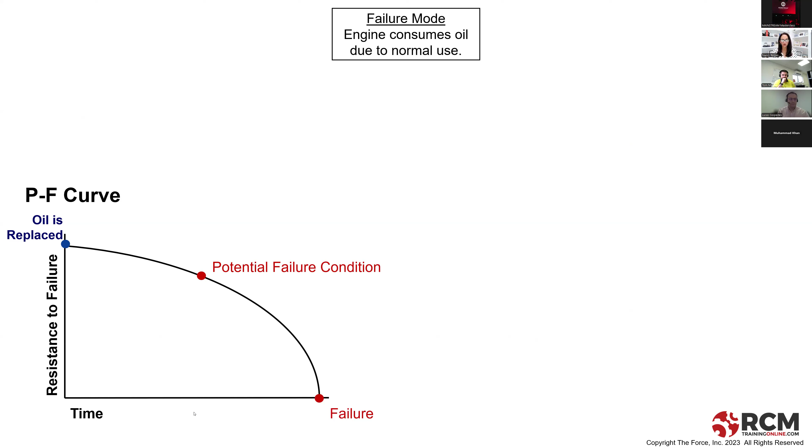So let's say here my oil is replaced. So the volume of oil is where it needs to be. Remember the P-F interval: potential failure condition, failure, and the P-F interval. Okay, so I just gave you the answer. Sorry. Hopefully you didn't see it. Okay, what would a potential failure condition be for my engine oil being low due to normal consumption? What warning, if I were to inspect, now you can inspect. So if I were to look, what could I check to see if my oil is low?

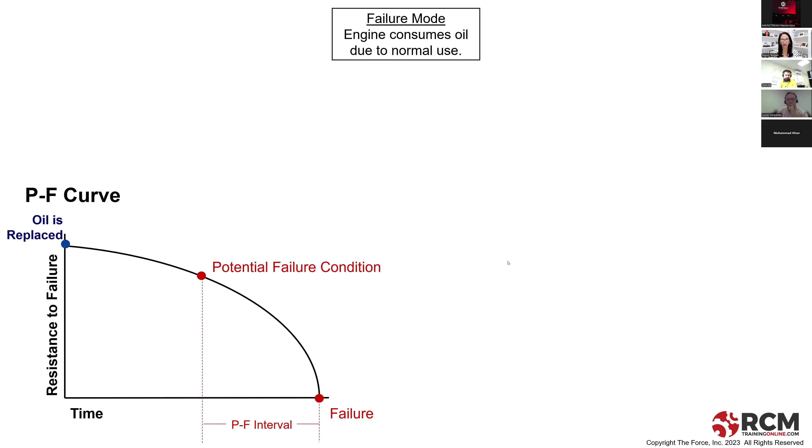Mazar, we didn't determine the potential failure condition yet. That's what we're looking at now. So what warning, what could I inspect to tell me my engine oil is in the process of being consumed? Okay, Scott, distance traveled, possibly. The dip, yes. So yes, Scott, that is a definite possibility. In the real world, there's usually more than one potential failure condition. But we would check the best one, the dipstick, exactly, right? So here's my dipstick. Here's full, here's low.

So now I have to determine what would a potential failure condition be? What would be the warning for me that I'm getting to the point, I certainly don't want to get past here. For me, I would say like 75%, right? I would want to become aware if my oil were here. Is everybody with me on that? Give me a yes. If you have a question, let me know. Okay, you got it.

So now we have to answer, what is failure? Now, failure doesn't necessarily mean functional failure where you're out of oil and you hurt your engine. So what could we consider failure to be if we're looking at our dipstick? How about it drops to the low level, right? Because me as the driver, I don't want to get below the low level, right? So now the question is, what is the P-F interval? How long does it take me to go from 75% full to the low level?

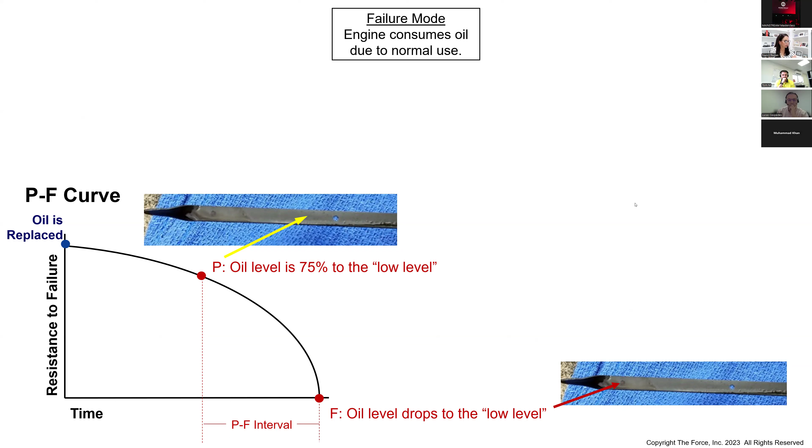Okay, so yes, and thank you, Peter. You said the low level is reached. Let's refer to the Subaru manual. This is what my Subaru Forester manual says. It says that number 1 is full level, number 2 is low level. And number 3, what they're saying is that the volume here is the equivalent of 1.1 US quart. Now, my Subaru manual states that consuming more than 1 quart per 1,200 miles is abnormal.

So what they're basically saying is the worst case scenario is in 1,200 miles, you will reach this low level. And they recommend checking the engine oil level at each fuel stop. So if I break that 1,200 miles down on my dipstick, right? If I break it up into fourths, 3, 6, 9, 12. Is everybody with me on this? Where the Subaru manual is saying worst case scenario, the minimum you have is 1,200 miles to go from full to low. Everyone's with me? Okay, good.

All right. So given this, if my potential failure condition is I'm 1/4 past the full level, and I've defined failure as oil drops to the low level, what's my P-F interval?

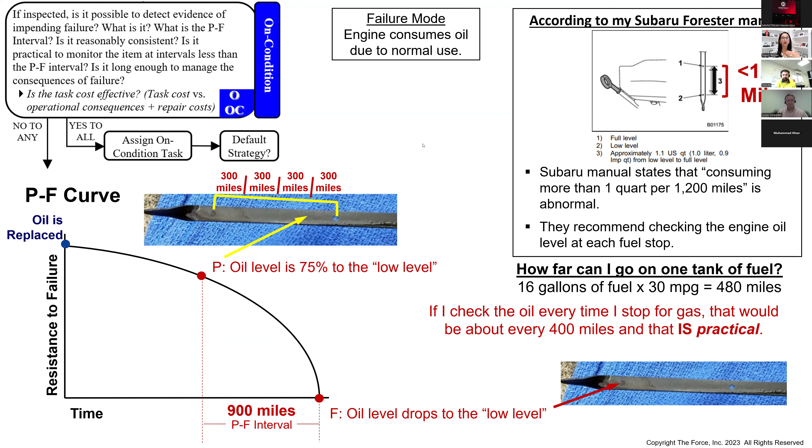So answering yes to all this, we've just determined that it's technically feasible. Now, is it worth doing? Is it cost effective? Well, we certainly don't need a cost analysis to know that it would be worth it economically to check the oil than to not check it and possibly be left on the side of the road, for me anyway. So I answer yes to that. When we answer yes to all of the questions in the box, then that means we can assign the task: at every fuel stop, check the engine oil level using the dipstick, replenish the reservoir as required.

This is basically the end. This is the big crux of what I want you to walk away with. Does anyone have any questions or thoughts, and at least if it's eye-opening or if it makes sense, can you let me know in the chat?

Or any questions also, just let me know. Is there anything confusing about that, Peter? Perfect sense? Okay.

Thank you, Matt. It's been a great way to practically apply this process, and that was my goal. Because if you can understand this, you can apply it to more complex stuff. And of course, there's a little more to say about the P-F interval, but this is just a 90-minute masterclass.

With the age, consumption would be different, and that can be recorded as well. And it is, Muhammad. The older my car gets, the quicker it is. That's a whole, yes, it's an excellent point. Easy to learn, got it.

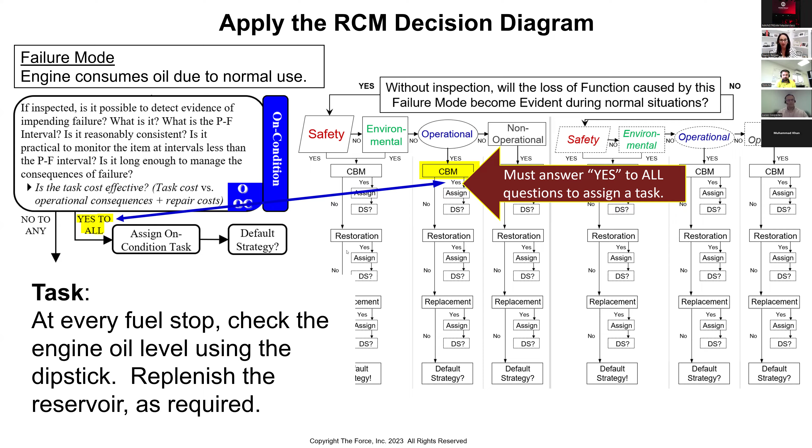Good, okay, great. And that's also a glimpse at the RCM decision diagram. So this will just take us a minute to go over. I want to very quickly look at default strategies.

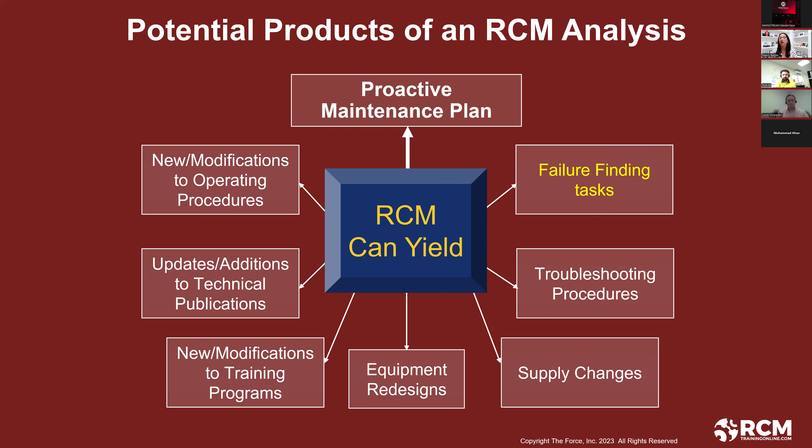Which is a solution other than proactive maintenance. Remember, we talked about this. One can be a failure finding task. A failure finding task would be like blowing smoke at the smoke detector and checking our protective devices. Remember, we talked about here.

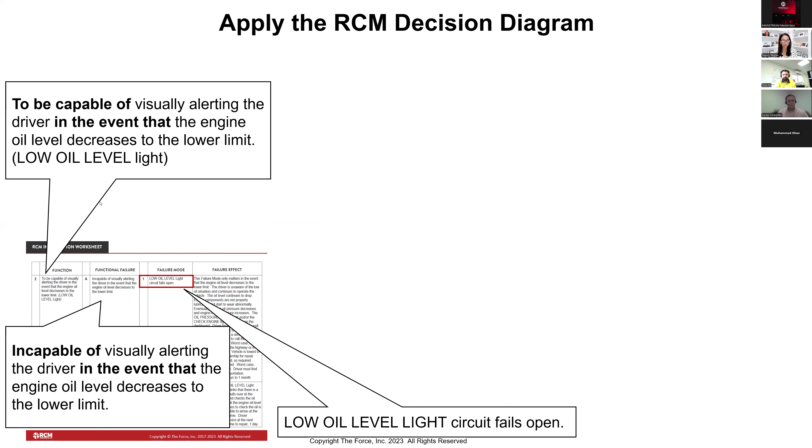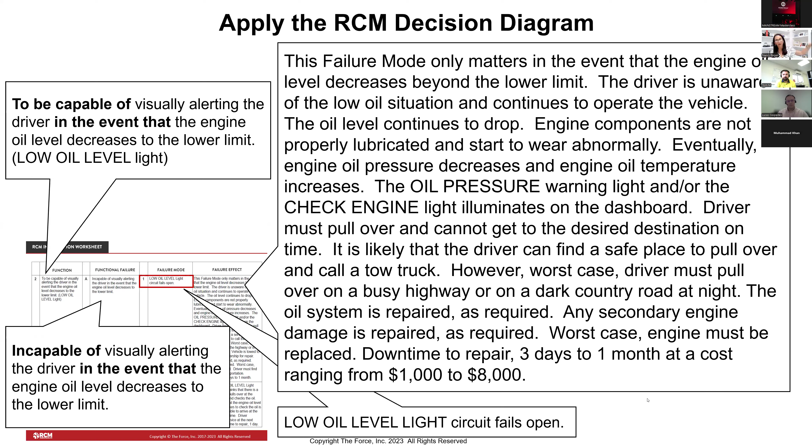We're back at our low engine oil light. And we said that the circuit fails open. We've already read our failure effect. It only matters in the event that the engine oil level decreases below the lower limit. We don't know it, we're driving, we do damage to our engine.

So if we go to our decision diagram and I ask you the question: if everything's normal and my low oil level light circuit fails open, will I know it? Will it become evident to me under normal situations? Yes or no?

It will not, right? Because assuming the level in my reservoir - there's yeses and nos. So let's just pause for a second. What we're saying is, without inspection, will I know if my low oil level light has failed, the circuit's failed open, but I have the proper amount of oil in my reservoir? I'm not going to know it, right?

Okay, good, Muhammad, it's no. So now this is hidden. For me, it has operational consequences - it's not going to hurt me, but it's going to cost me. Obviously there's no CBM or preventive maintenance I can do on my circuit, but there is possibly a default strategy, and that is maybe I can do a failure finding task on it. Maybe there's something else I can do that's outside the scope of what we're talking about today. But I just want to make you aware that just because maintenance isn't the answer, there could be another answer.

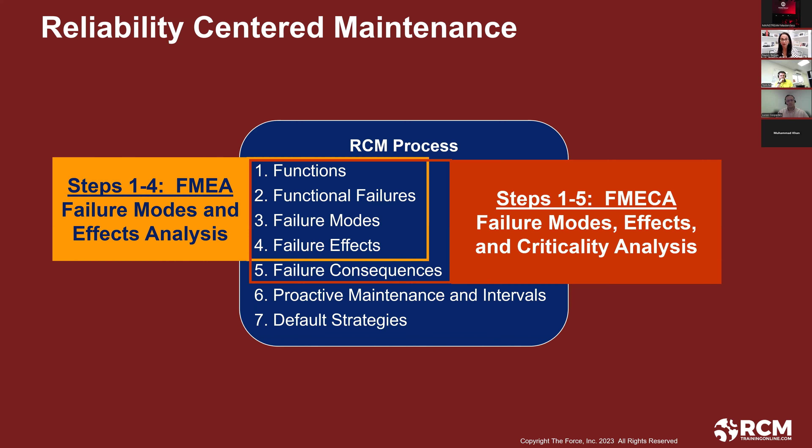So just to sum it all up, when we do reliability-centered maintenance, we create an FMEA with the first 4 steps. When you include step 5, you actually create an FMECA. And like I mentioned, it's really important to do a facilitated working group approach to RCM so you can get all those perspectives baked into your analysis.